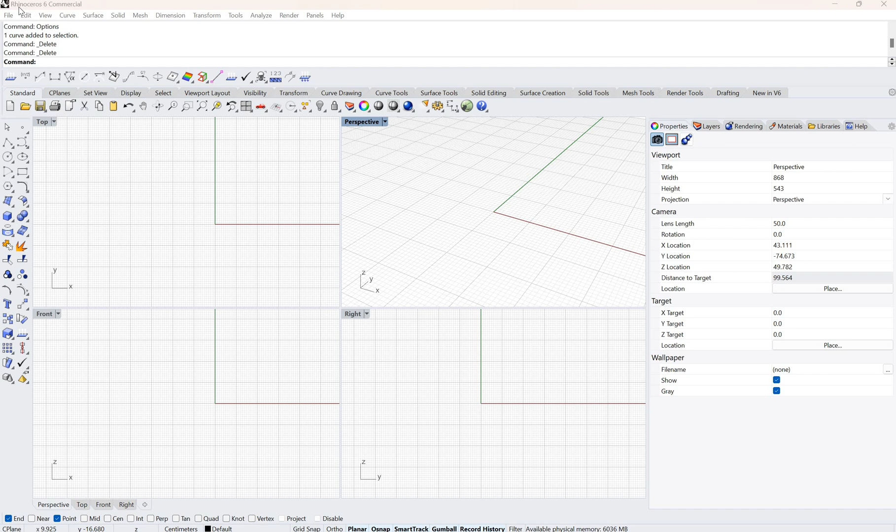Okay, this is a two-part video for the belt. Now, what we are going to do first is go to File, and here I'm going to select Small Object Centimeters and click Open.

It will open a grid for me. Right now from the green line, if you see, it has 50 blocks here, 50 blocks here, 50 blocks here, 50 blocks here. So these are basically grids that are moving.

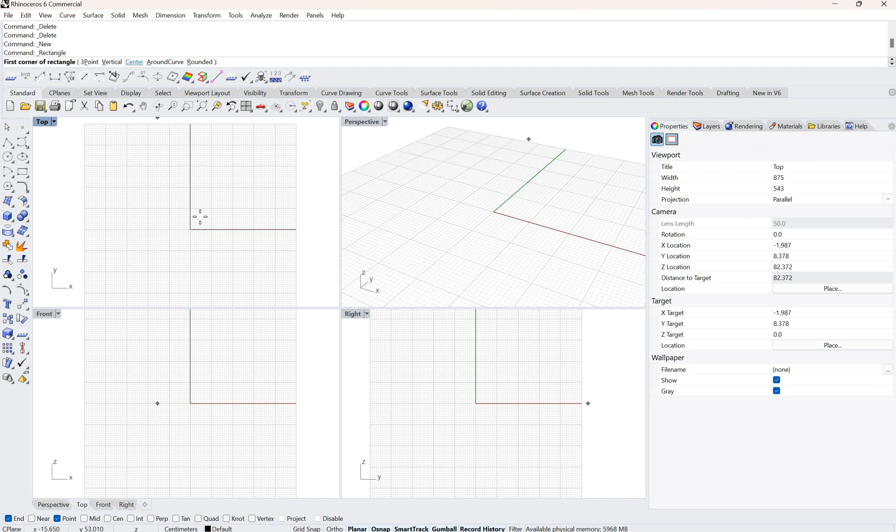Now let's say I take the rectangle. I want to write the exact measurement, so I click on center, type 0 in the command menu, and just draw a rectangle like this. The length I want is 121 because I measured it, click enter. And for the width I want to type in 4, click enter, like this.

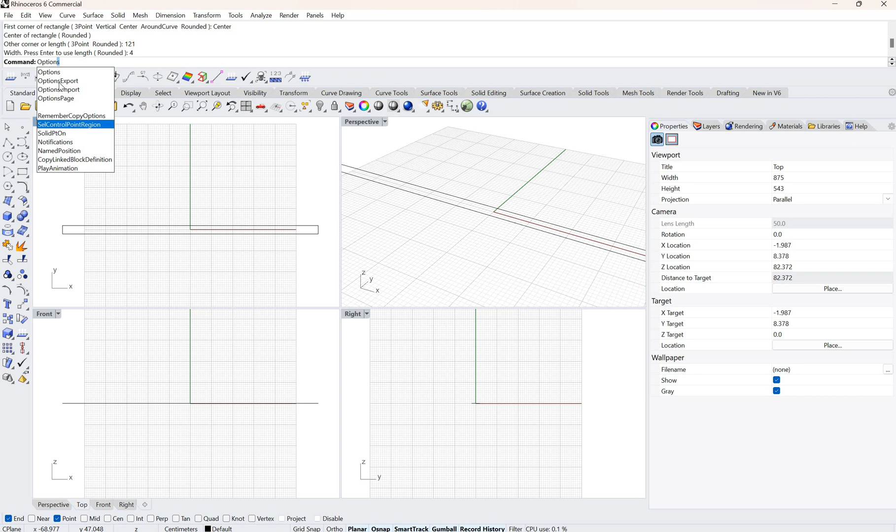Now the next thing I would want is for the grids to increase so that this rectangle comes within the grid. So in the command menu I'll type options, go to the grid, and go to grid line count and click on 100. So here I am with the rectangle.

Now what I'm going to do is select the control point curve and start from the center. I don't know where the center is of this line, so I click on center and it will bring me there. If I don't want to click center, I'll just click mid. So mid is good, it brings me to the center like this.

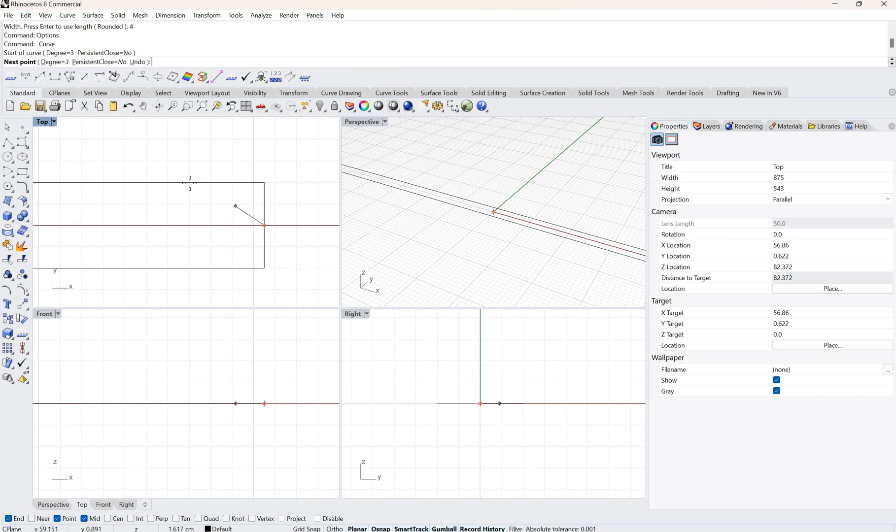Okay, and here I'm going to make a curve. So this is my curve, if you can see here.

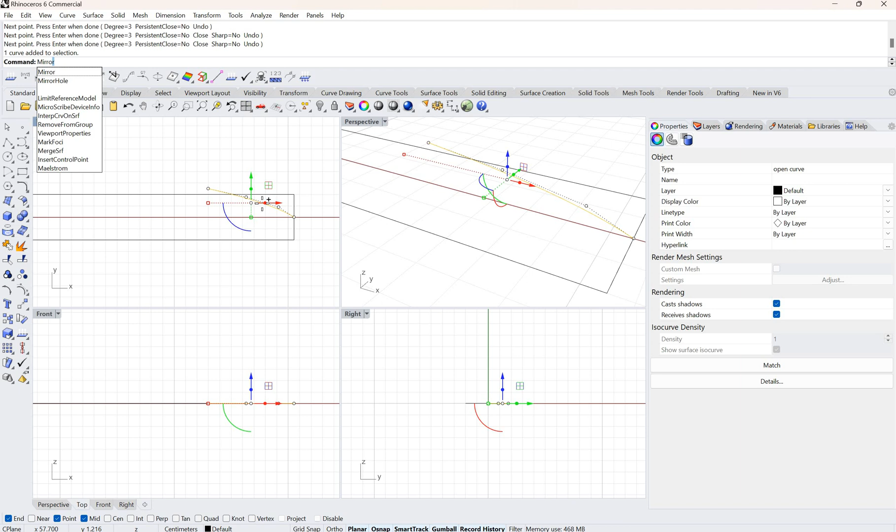Now what I'm going to do is select it, and type mirror in the command menu. Here, center axis, click shift so that it comes out straight, and just check whether it's come out right or not.

If it's not come out right, you can move the control point to the center like this. Now I'll select both of these lines and click Control J to join them. This is how I know it's joined - you can see two curves joined into one open curve.

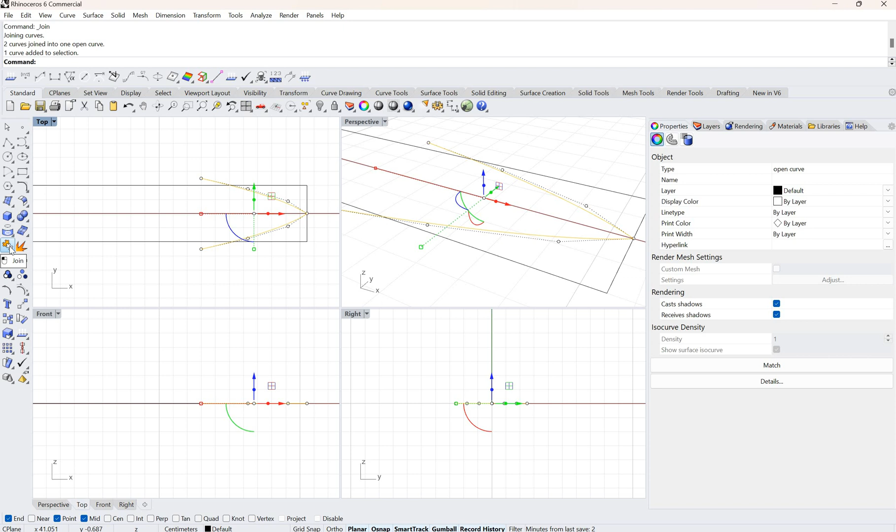This command will always come in case your lines are joined; this message will not come in the command menu if they are not. So make sure you see that. Also, there is a tool here as well - if you see these two puzzle pieces joining together, this is basically for join.

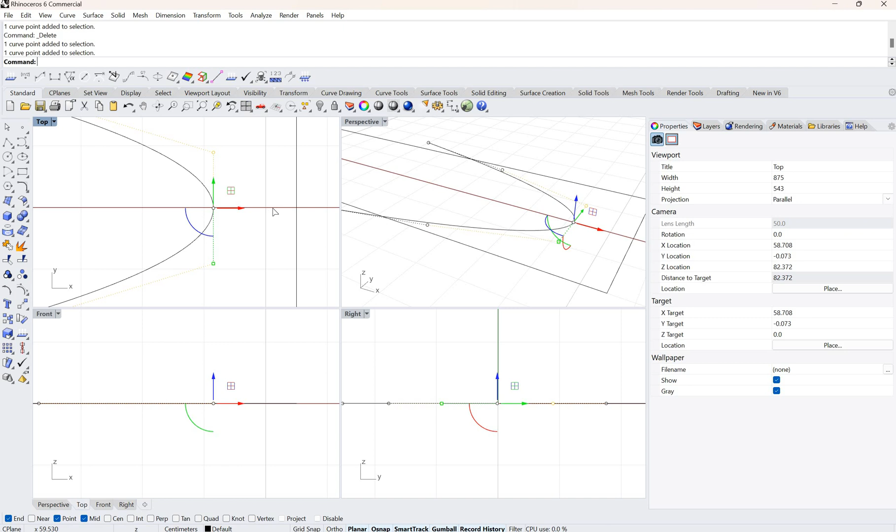Now I want to see, this is too sharp here. Generally we don't have so much of a sharp edge in our belt, so I'll click on this control point and delete this point. Now I'm just going to drag these two together and bring it to the rectangle like this.

Now we're going to trim certain areas. Let's say I want to select this and trim the edges, so I'll click on trim and remove these two areas. Okay, that was an easy one.

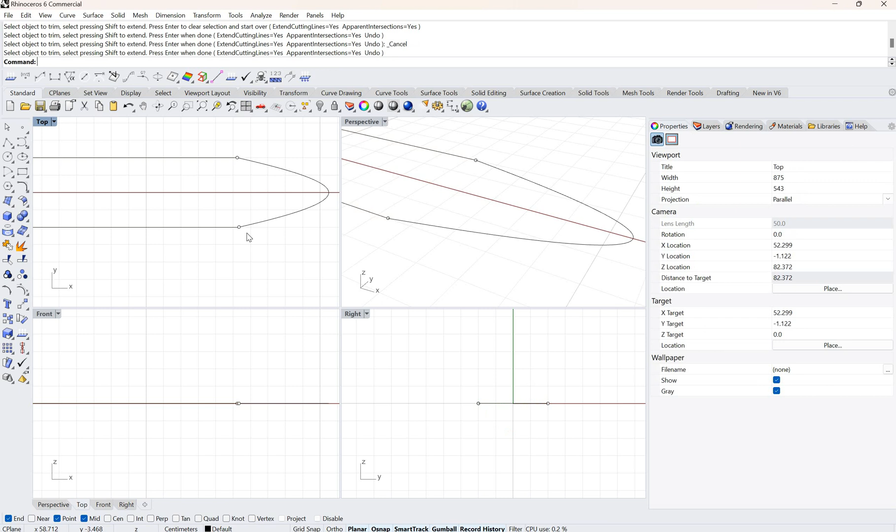Now let's say I want to take this part of the rectangle, click on trim again, and remove this part and this part. To make it look a little more organic, I'll select this part, select these control points, zoom in, select it, and click on this square and push this together like this.

So we have a rectangle that is going together, and we have this entire shape of the belt that is made. Now all you have to do is select all of this and Control J to join it. Now the next thing I want to do is use the offset curve.

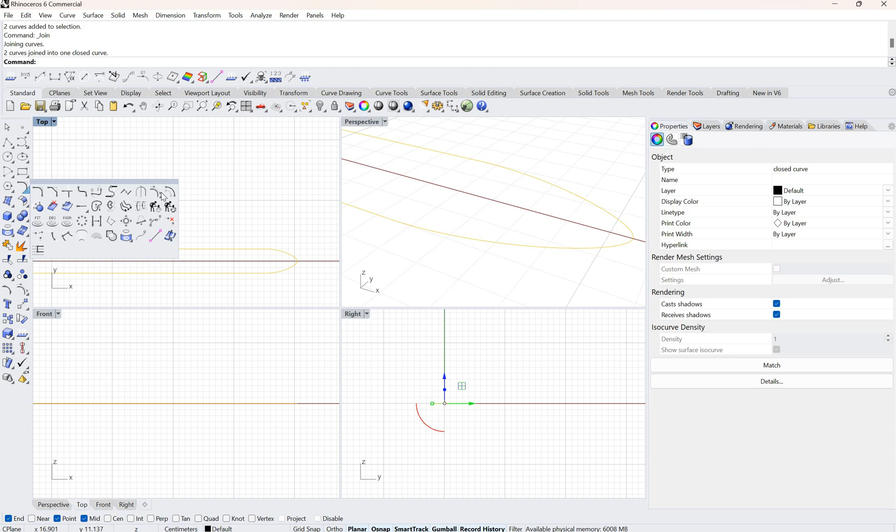So I'll select over here, go to the curve menu and select offset. Now you can find the curve tool here as well - you can select the curve tool here. Okay, now just select it and make sure the distance is set correctly.

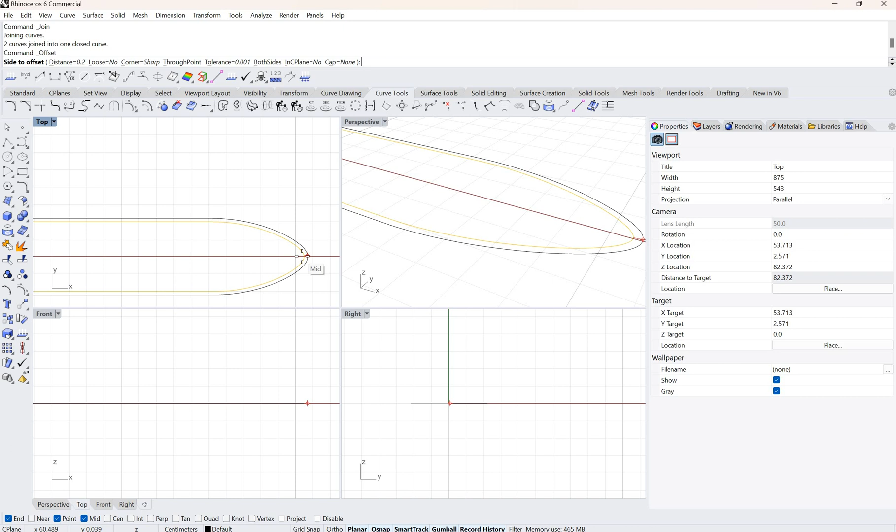Make sure the distance is 0.2 centimeters - I've written 0.2. In case you want 0.3 or 0.4, you just need to type in the distance. I have already done this, so I'll just select it. And that's it. Now this inside offset is basically for the embroidery line.

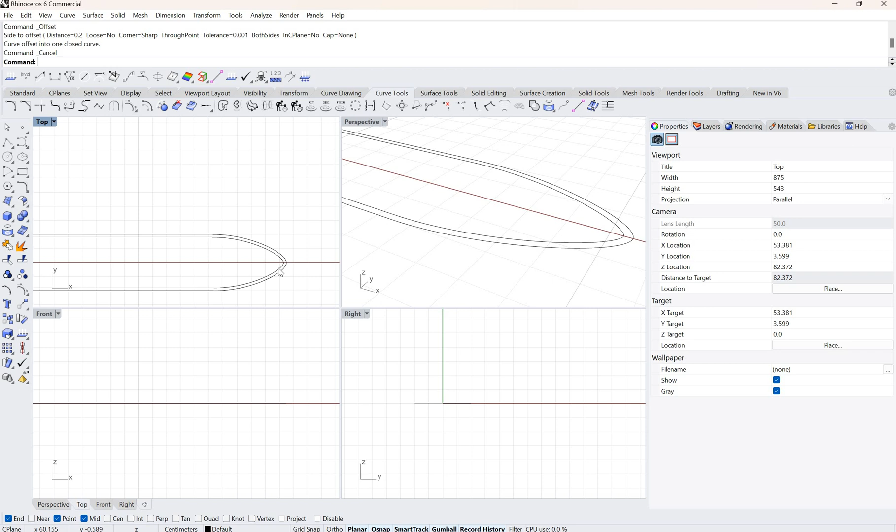So I'll select this and go to the standard menu, and here we have hide object, so I'm going to hide it, like this. Now the next thing we have to do is bring a curve to this.

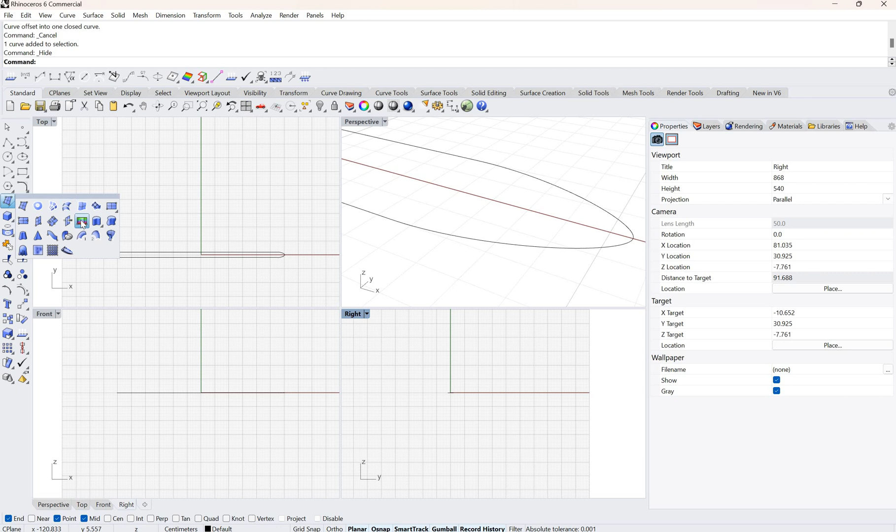Another way of getting the picture that you want to copy is you can go to the surface menu and select Add a Picture Plane, and let's say this is the picture you want to add. Just select it and put it like this.

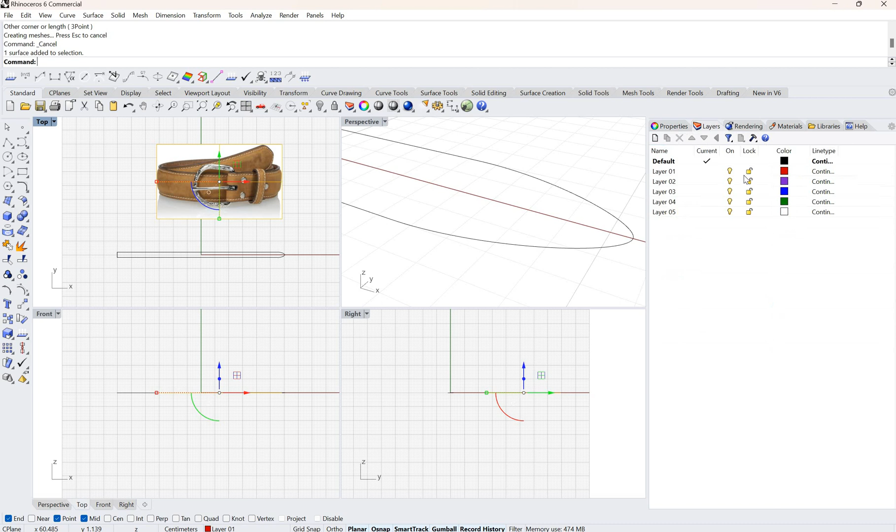What you can do is select this, go to the layers section, probably put this in layer 01, go to layer and lock it so you can see what's happening. My belt will not purely look like this, but our efforts will always be to make something like this.

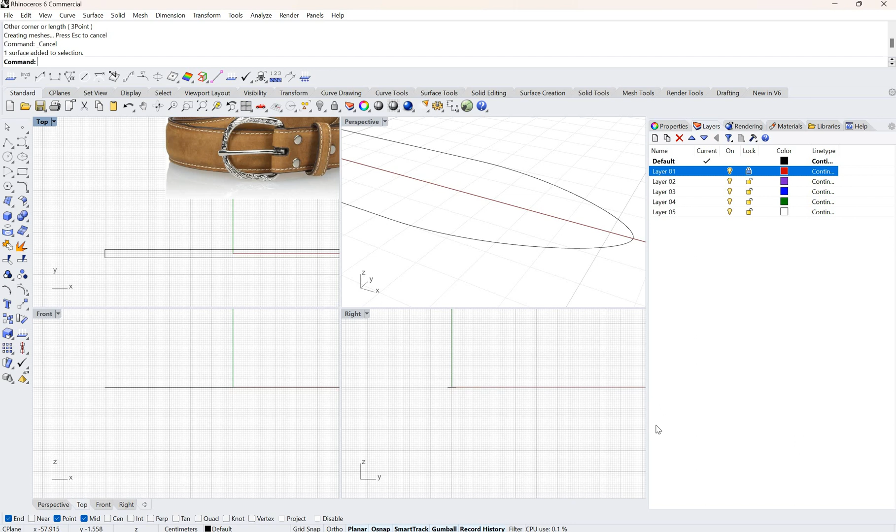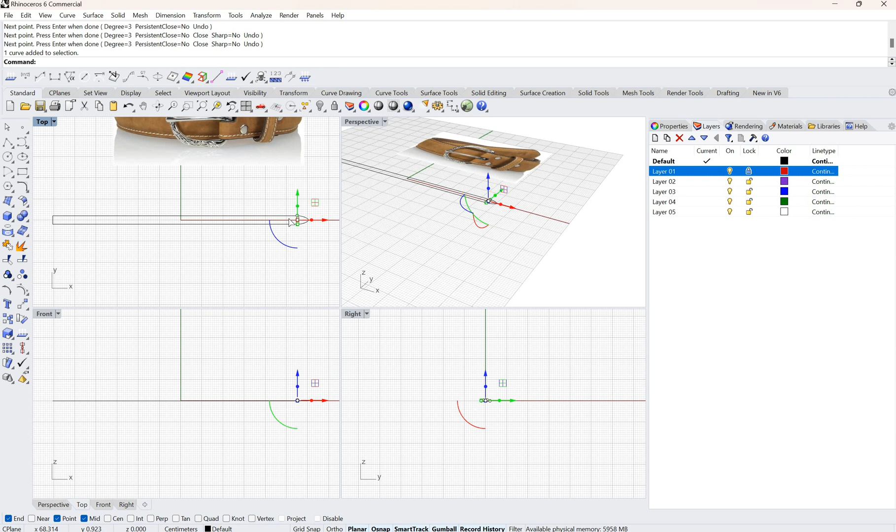Now what I'm going to do is go to the right view area and go to my control point curve, select it, and make a marker point like this. Here, I will just select this and bring it to the center like this.

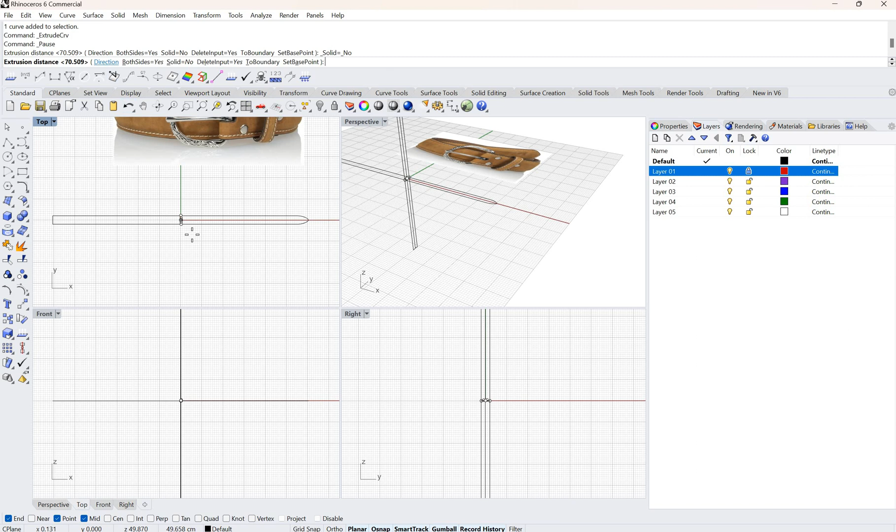Now I'll select this and go to curve, and here I would want to extrude the curve. So I'll go to surface, extrude curve straight. I would have to tell the direction - my direction is probably here like this, not like this, it's coming out slanted. So let's say I don't want this, I'll do this again.

I'll just push this here. So we have something like this going on, and here you can adjust, probably if you feel that one of the curves is going off.

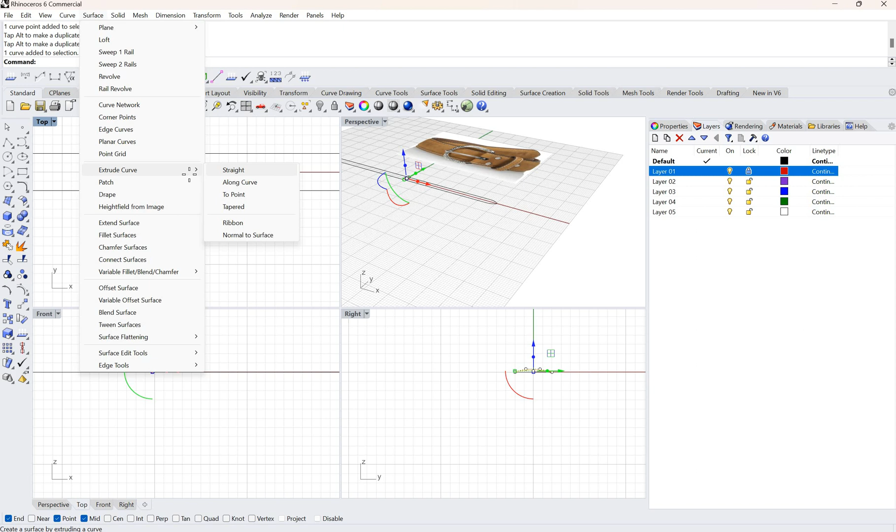So just select it, and let's say I select this and go to Surface, then Extrude Curve Straight, and here go to Direction, select Straight, and click like this. Just move it, plane like this, select it.

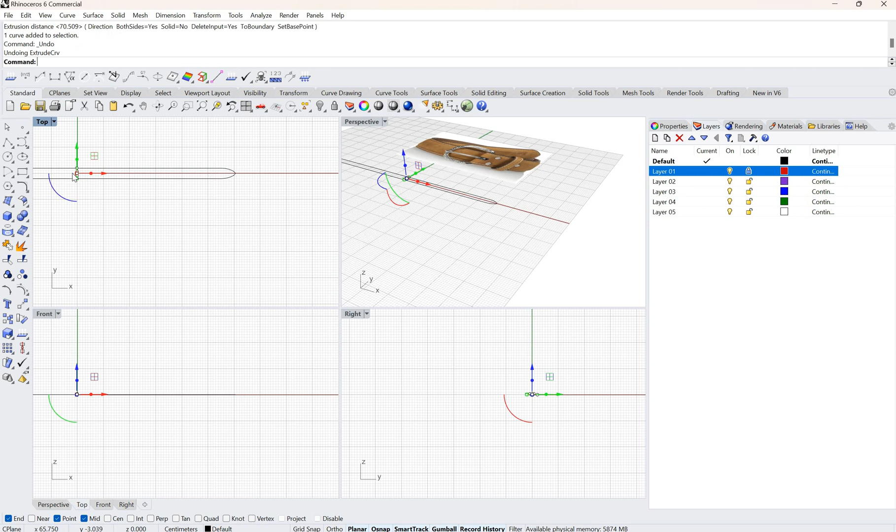If your lines are coming too diagonal, what you need to do is adjust this as well. You can push this one here, make it straight instead of going a little bit haywire. So you can just select it.

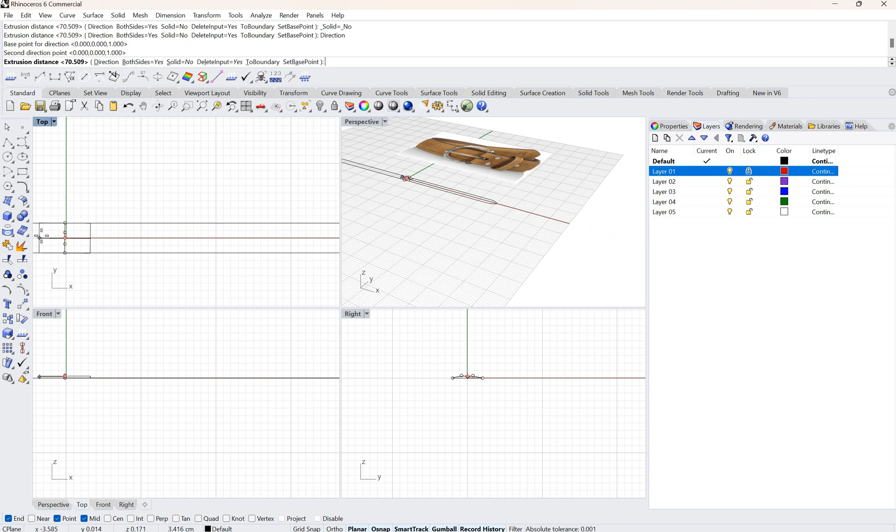So now I'll try the Surface Extrude Curve again, go straight because I want my direction to come out straight. So just select it like this, and now I can just extend it.

So these errors will come, but you don't need to worry, you can adjust it. I'm doing it with all the errors, so here I'll see it in the shaded view.

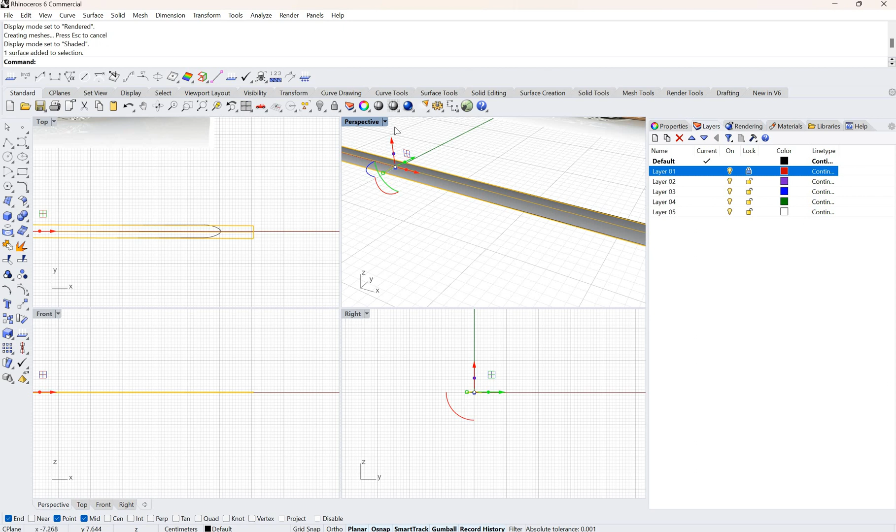Now I'll lift this up a little bit. What I want is for this to be cut and trimmed on this surface, so basically this shape is going to come on this surface. Now I will also make this a little broader.

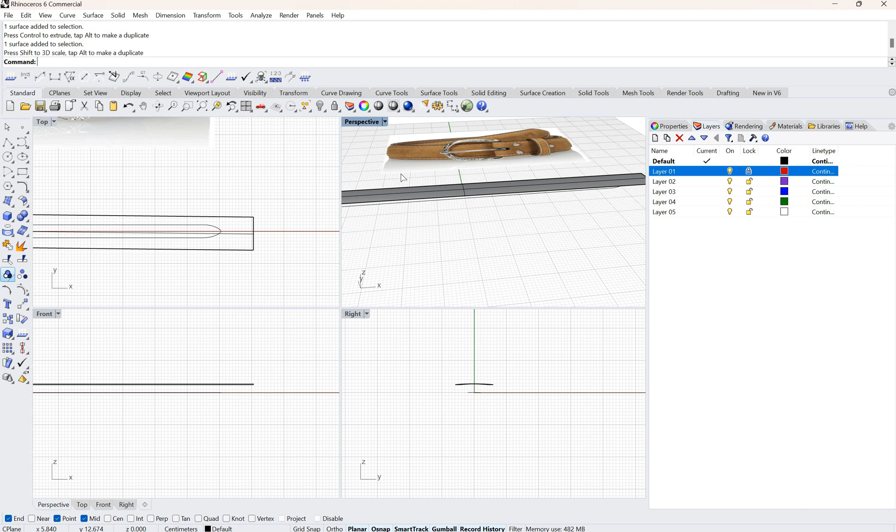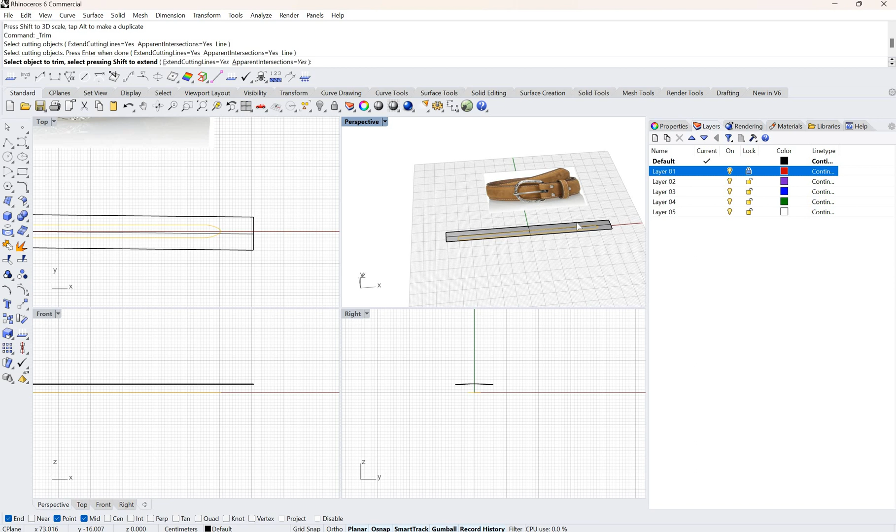Okay, now I'll go to the Trim command. It's asking me to select the cutting object, so I'll select the bottom one. If you can see this, this image is at the bottom. I'll select this image, click Enter, and select it, making sure it is on the outside, not the inside, because if you click on the inside, it's going to trim it and the shape will be reversed. So make sure you are on the outside. Just click like this, and you are going to have a shape like this.

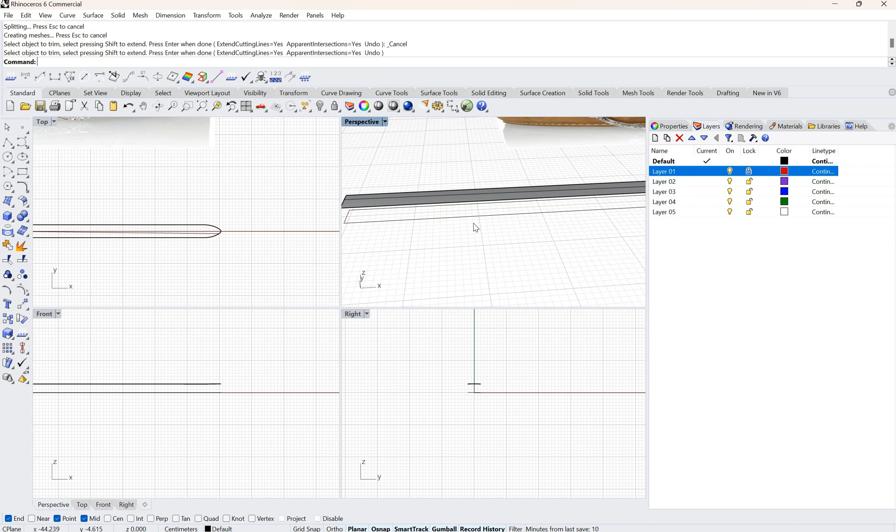Now we are not going to delete the bottom one, I'm going to hide this instead. Another thing I'll do is select this surface and add a height to this - 0.35, click enter, and just push this down on the C-plane like this.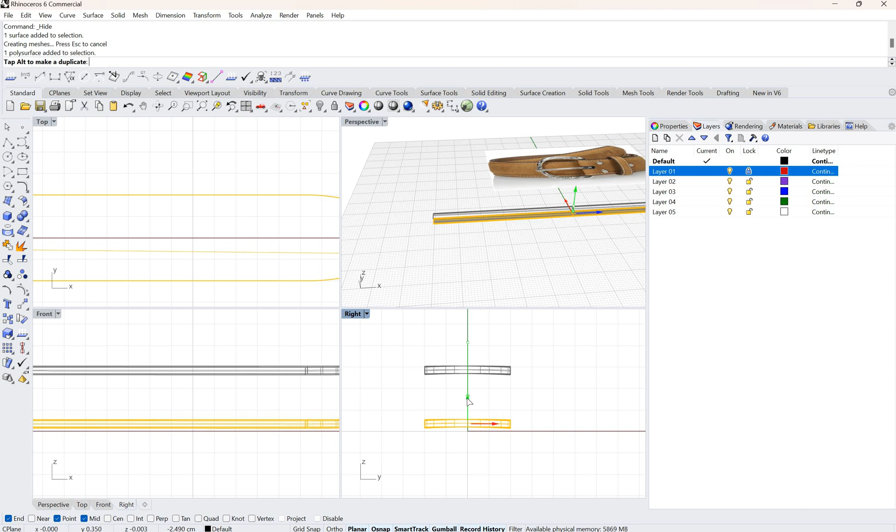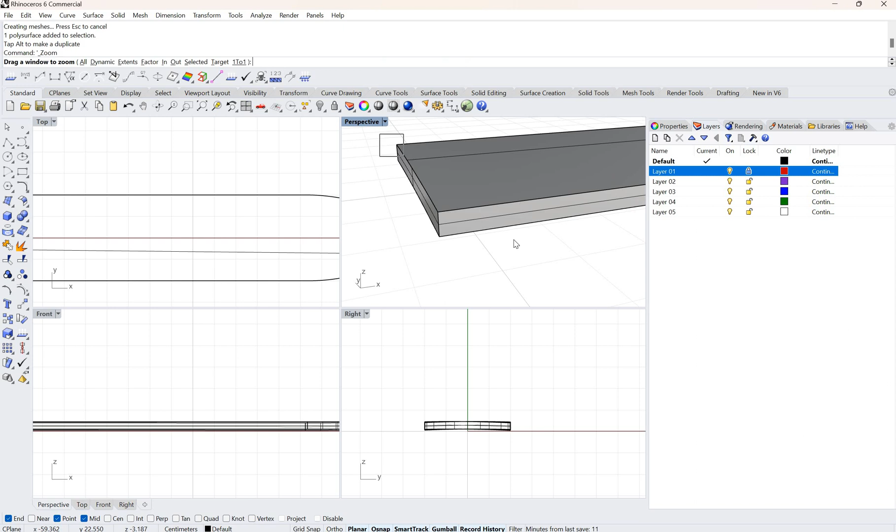Okay, so we have something like this going on. Now here what we need to do is add a fillet on the edge. I'm going to select this zoom window and select this so I can zoom in and see it properly.

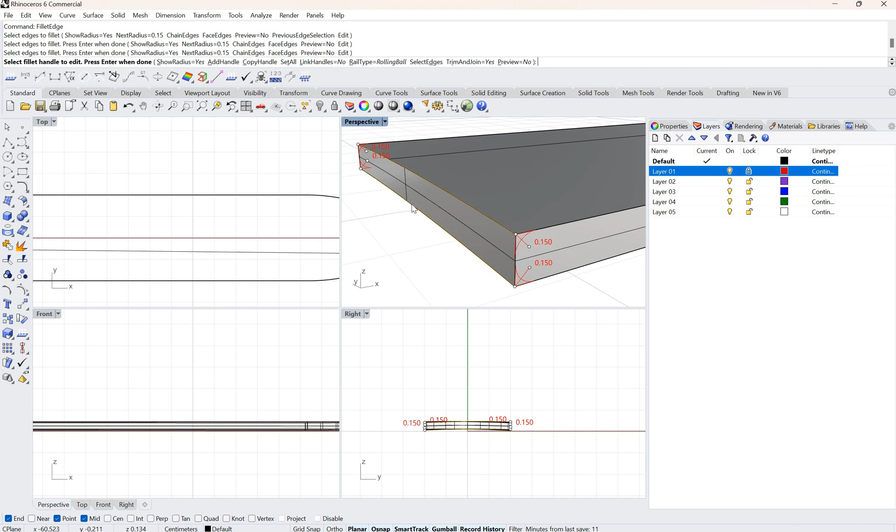And here what I'll do is use Fillet Edge, select this side, and radius is 0.15. Since I've already done it, I know exactly how much radius I want - you can just select this and put your own radius. I'll select this part, then click Enter, click once more, and I get a nice fillet like this.

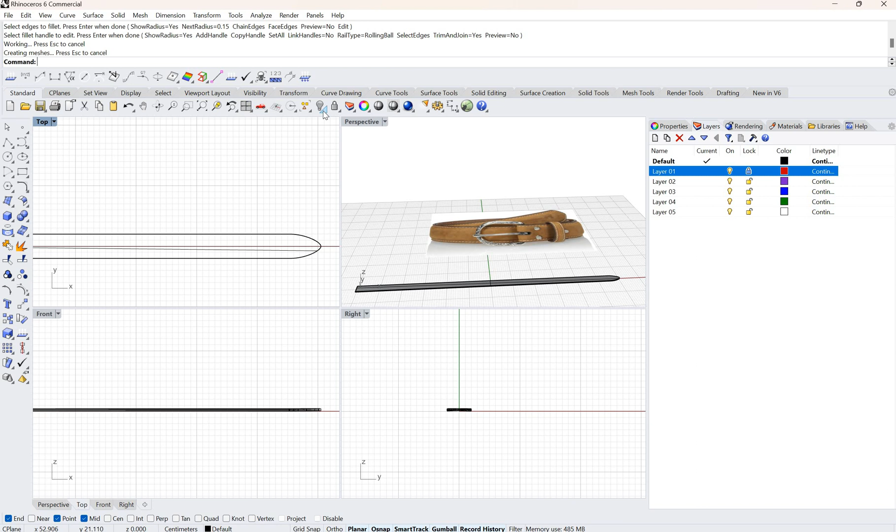Okay, now here, so now we need to add the stitching line to this. I'm going to get the hidden line that I wanted to use for stitching. I'll click on the hide object area, and here I'll click the right mouse button to get my hidden surface as well.

So I'll select this part and just push it up a little.

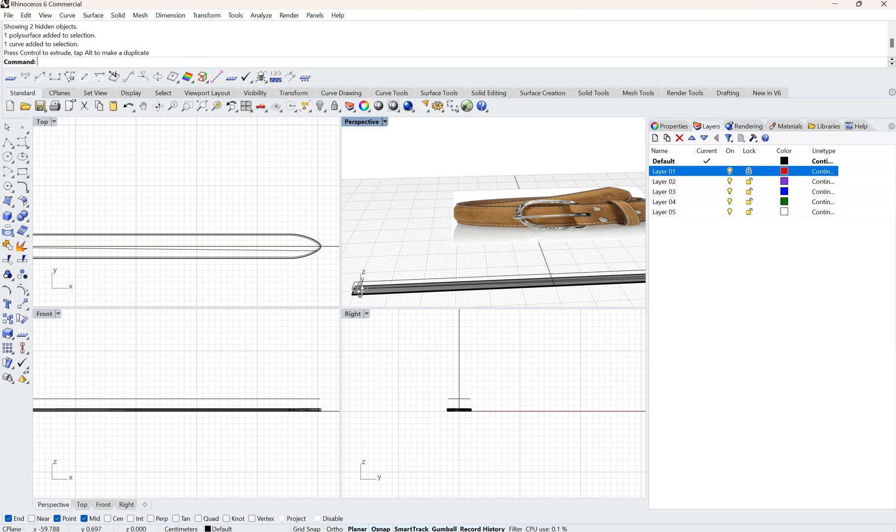So here I have this, and now I want this to be projected onto the surface. What I'm going to do is first select all of this and click Ctrl J, so I know exactly that this is all joined together and I don't have to do anything else.

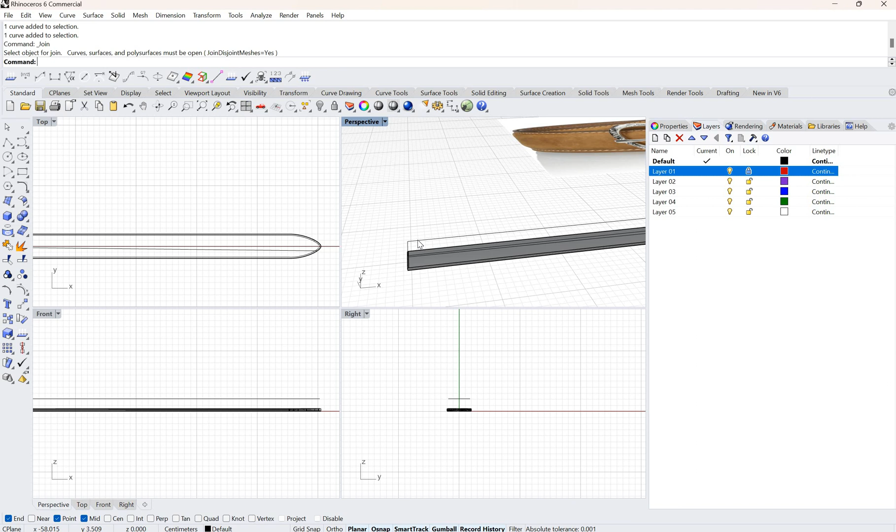And then I will click on this and click on Project Curve, click on the surface I want to project it on, and click Enter. Now if you see this, it's projected on the surface.

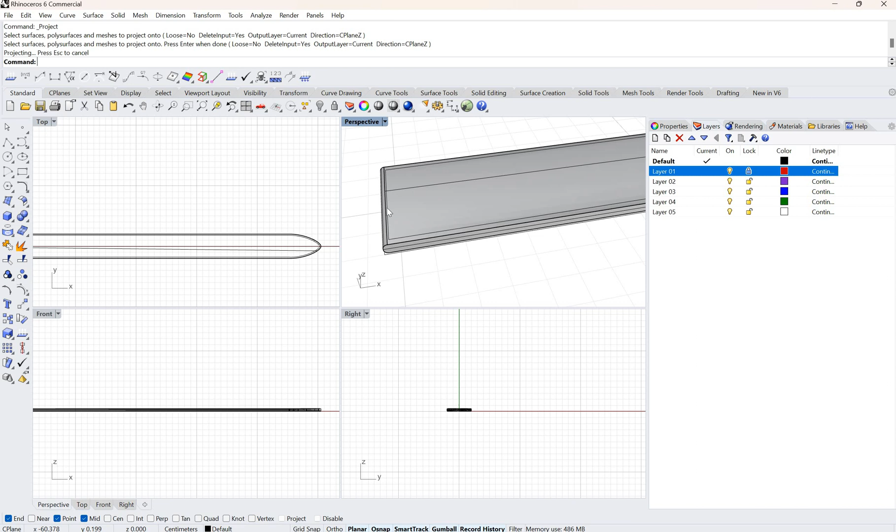Now I'll click Control Shift. What Control Shift does is, let's say I don't want this line, so I'll specifically select this line and delete it. Let's say I want this line and this line - I want the control points to show and it's not showing, which means my line might be broken. So I can select this curve and select this curve again, because when I did Control Shift and removed one line, that's why the line can be broken.

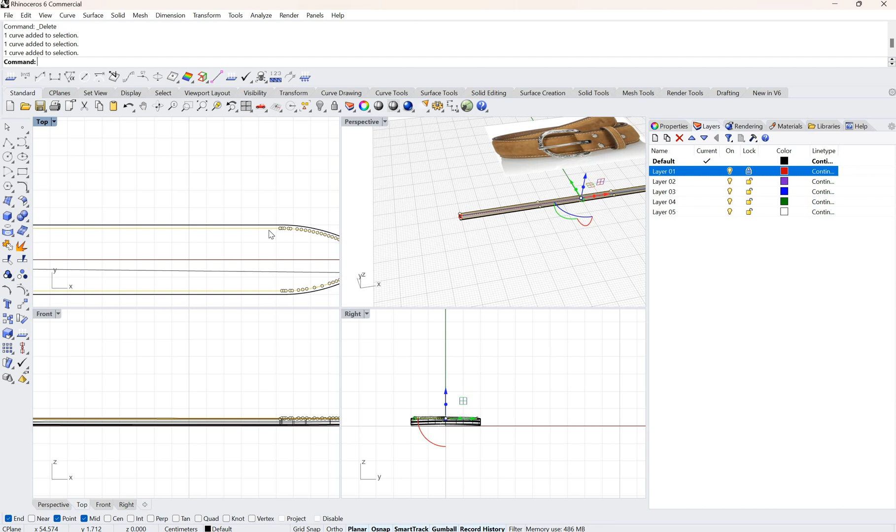So you do Control J again, and now you can easily move these two lines. Let's say I want to move - now the control points are active, so I'll select this point, shift-select this point, and bring this to the side a little bit like this. Okay, here I will be adding the stitching, so we're going to start with that.

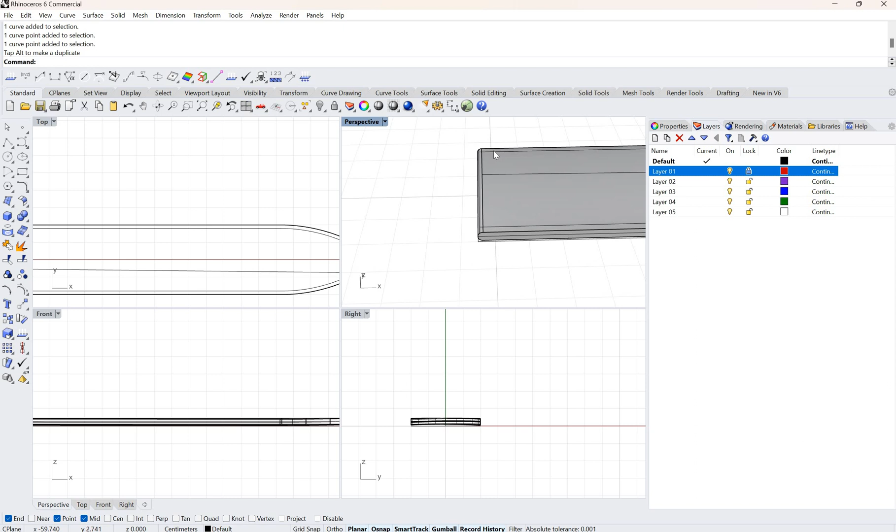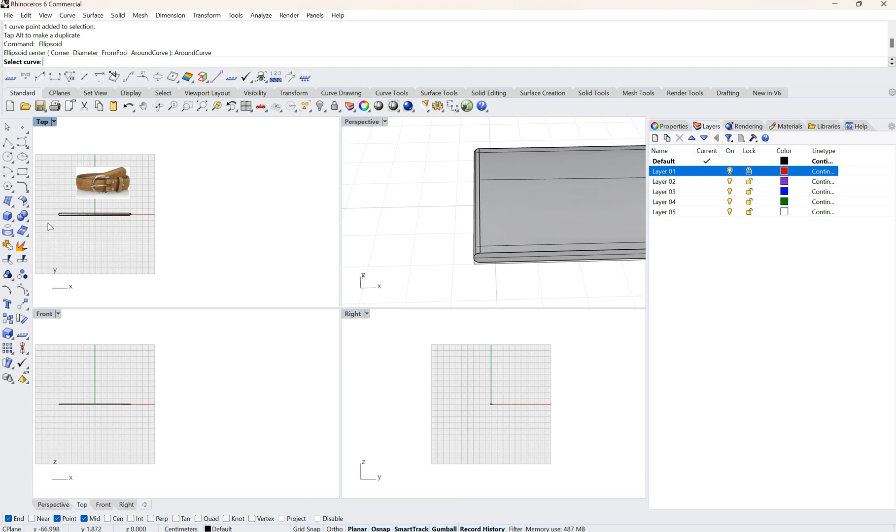I'm going to go over here and select the ellipsoid. I can just click on the command menu as well, so I'll click on Around Curve. So here I want this to be shown.

Okay, and I'll go over here, select the line, and here just select the point here and click Shift, Alt. So maybe I just want to select this.